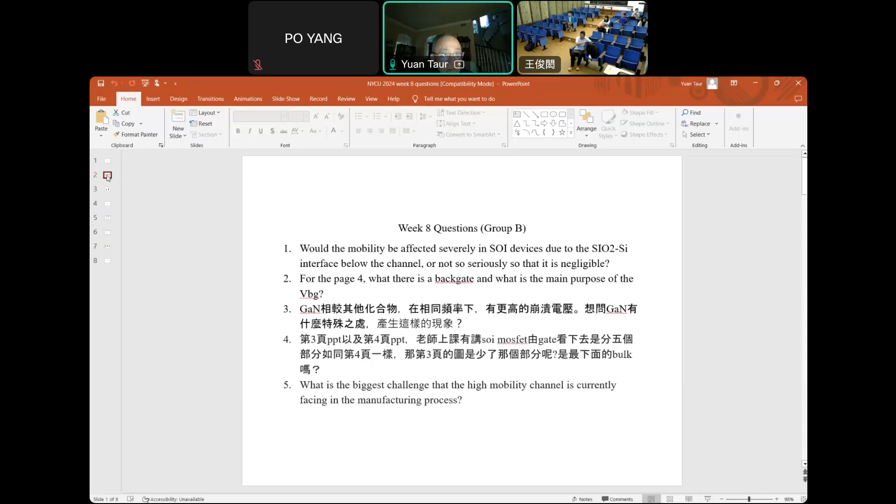Okay, first question: would the mobility be affected severely in SOI due to the interface below the channel?

As far as I know, for thick SOI, the mobility is not very different from bulk. But for very thin SOI, thinner than 5 to 10 nanometers, the mobility could degrade because the back interface is too close to the front channel.

Next question, refer to this chart. There's a back gate, VBG. What's the main purpose? Well, there's a substrate called a back gate, and the bias has some effect, depending on how thick the buried oxide is.

We will derive some equations relating the effect of the back gate bias on the threshold voltage. This is kind of like in the bulk MOSFET, where you have substrate sensitivity. For bulk, beyond the maximum depletion depth, if you bias there, that will affect VT. So it's a similar effect.

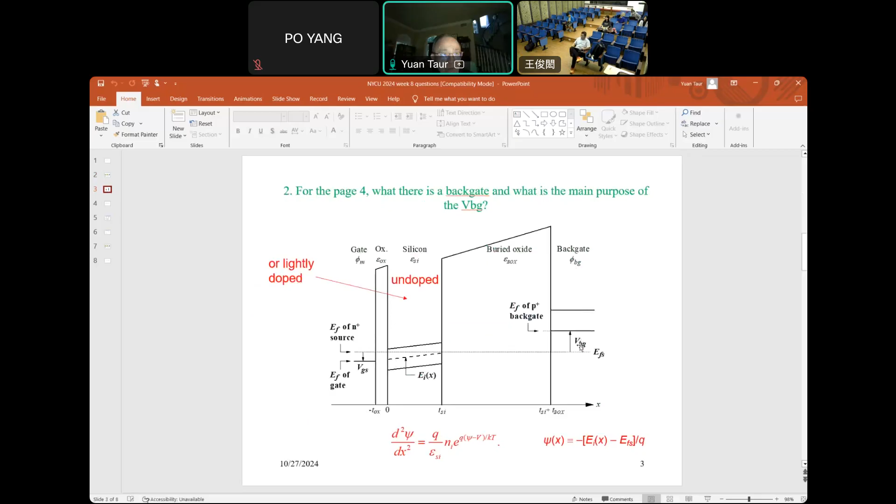Next question is about gallium nitride's high breakdown voltage. I think the key answer is the very wide band gap, 3.4 eV.

The breakdown voltage depends on the band gap, because for impact ionization, the electron has to be energetic enough to produce electron-hole pairs, meaning the energy has to exceed the band gap. So if the band gap is very high, it takes a very high voltage for this breakdown impact ionization to occur.

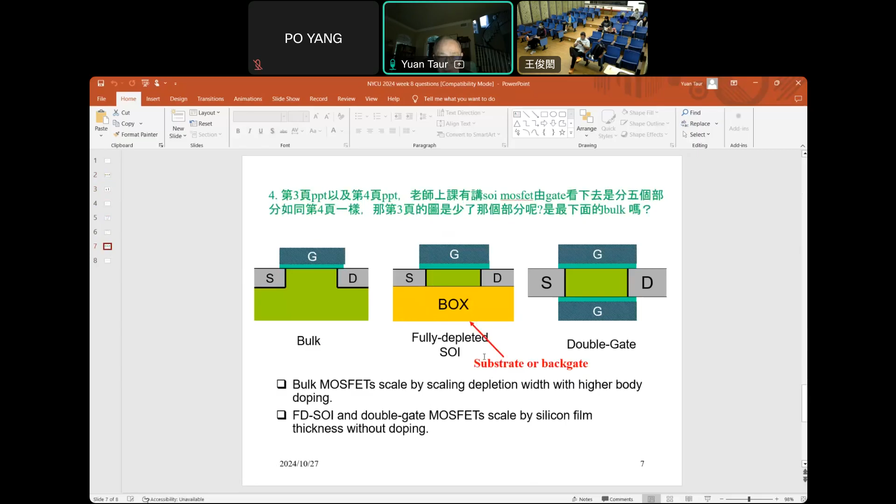The last question I cannot answer, but Sun Yanzang, who can't be here today, will be here next Monday, and he will address this question when he covers the next part on November 4th. Okay, so that's all the questions.

Let's go back to chapter 7, where we had, let's see.

Okay. Andy, so you see the SOI chart? Yes. Okay.

So we covered this in the last class. At the end of last class, we drew the band diagram and defined the potential with reference to the n-plus source Fermi level, this dotted line here, and we can actually solve the equations. The complete solution is here.

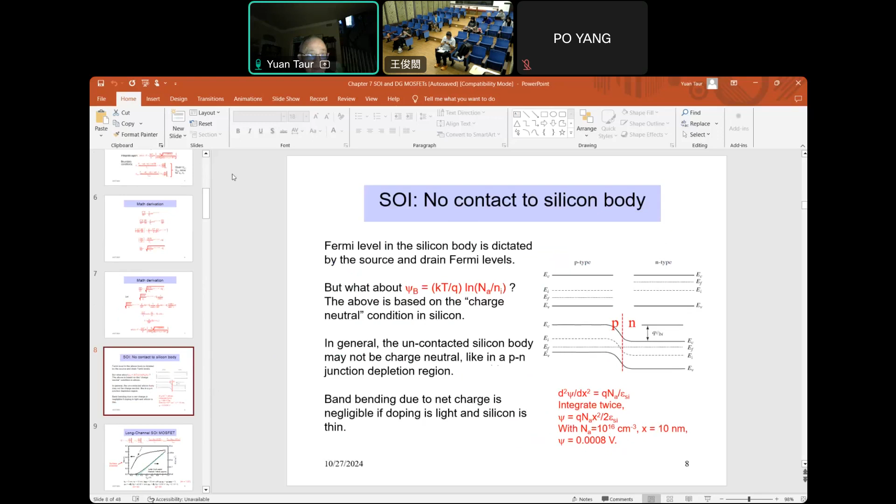So as long as the doping is not much larger than 10 to the 16, and the thickness of SOI is not much larger than 10 nanometer, we can treat the silicon as undoped. This justifies this model approach, that there is electron mobile charge only with no depletion charge, which makes the differential equations solvable analytically.

I went over that before in the last class. So if you follow this model, we can solve in general the potential as a function of x. I'll show one example in this chart. So the parameters are given at the bottom here.

2 nanometer oxide, 10 nanometer silicon, buried oxide 25 nanometers, which is not very thick. And the phi m, remember phi m is the work function of the front gate with respect to intrinsic silicon. Okay, let's go back.

So that's phi m, the gate work function. And what goes in the boundary condition is phi m minus phi si, where si means the work function of intrinsic silicon. We call this phi mi. And for the backgate, we have a backgate work function, again minus intrinsic silicon, and we call this phi bgi.

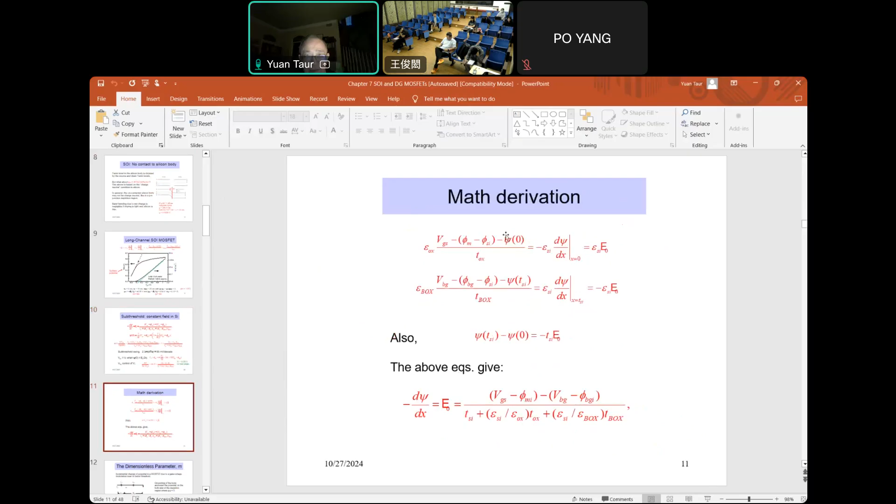That's the solution here, and then we can solve for psi 0. Basically, once you know E0, you can solve psi 0 here. And that's the result, where we introduce the effect of M.

This M actually has the same meaning as in the bulk. Remember that in bulk, we introduce the M factor, which is the ratio of when you apply a differential gate voltage change, how much the surface potential changes. That ratio is defined by M, so it's the same thing here.

So M is defined by the change of gate voltage divided by the change of surface potential, and psi 0 is given by that. So we can solve M, and M is given by this in general, which is 1 plus that, exactly the same as, in other words, if you use this for bulk and then interpret the edge of the depletion region as the substrate or the backgate.

In other words, go back here. The distance, the dielectric distance from the front surface all the way to the backgate, serves the purpose of WDM in bulk. WDM is the depletion width, and if you use that as WDM, then everything just follows.

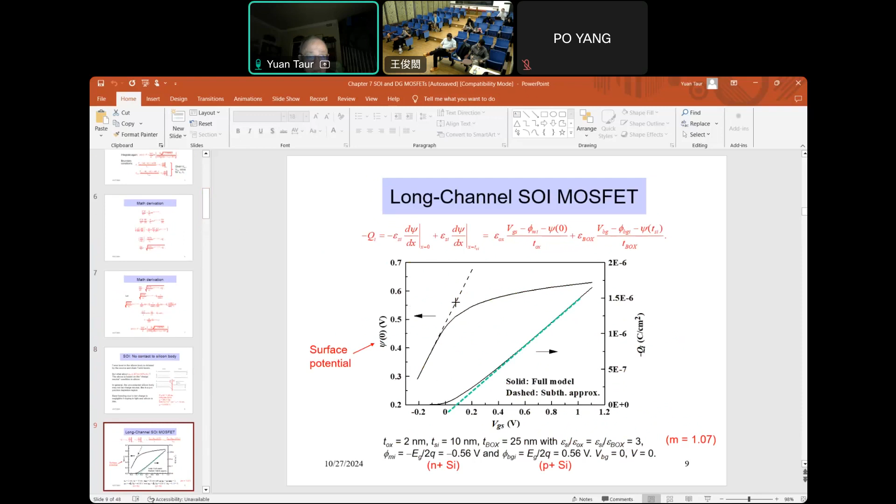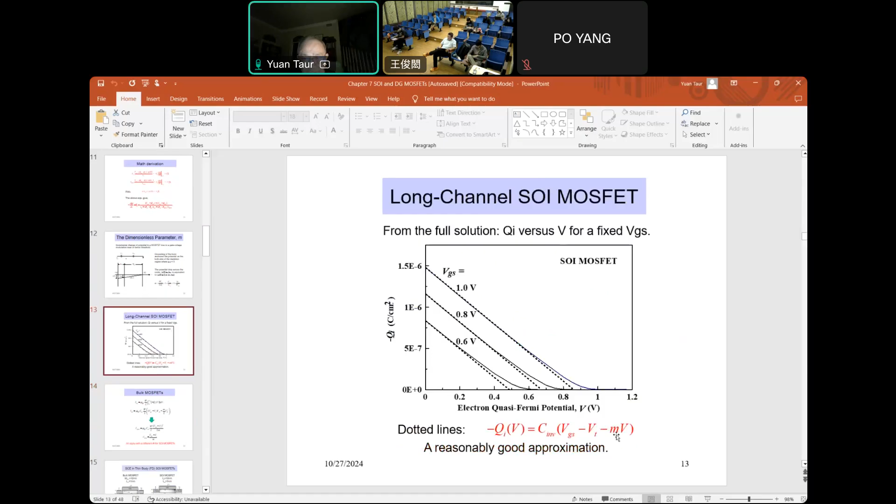So if you apply this, then you can get the current very simply, because remember that in bulk MOSFET we have the current proportional to the integration of QI from V equals 0 at the source to VDS, V equal to VDS at the drain. So if you integrate this, we obtain this equation, which is exactly the same as bulk. And then, of course, the saturation current ID-sat is given by that, and the VD-sat occurs at Vg minus Vt over M. So the only difference is M, the definition of M. For bulk, M equals 1 plus 3 Tox over WDM. For SOI, M equals this: 1 plus front oxide divided by T-silicon plus the back oxide. Once you know M, then the current can be calculated.

So far SOI looks very promising. It's better than bulk because M is close to 1. If M is close to 1, you have a larger saturation current, and you also have a better subthreshold swing. 60, if M equals 1, is 60 millivolts per decade. So it turns off fast, and when it turns on, it's a higher current. That's why in the beginning, sort of in the middle 80s - that's already 40 years ago - people were excited about SOI. But

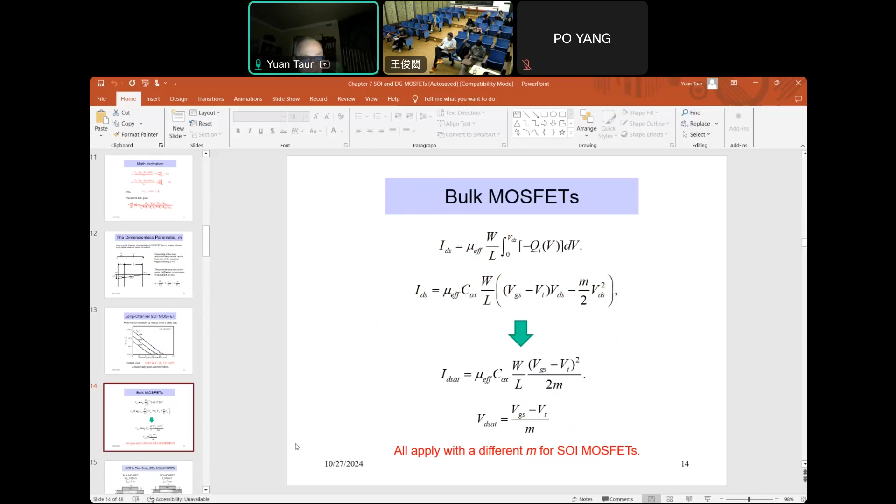Unfortunately, SOI has drawbacks, and that's what we're going to talk about. It's due to short channel effect. So far we modeled SOI long channel MOSFET, but what about short channel? Just like in bulk MOSFET - chapter 5 was long channel, chapter 6 is short channel. So far, long channel looks good because M is close to 1. But when you go to short channel, that's a different story.

The biggest problem with SOI, shown on the right, if you look at the field pattern, is that compared with bulk MOSFET - we assume that the depletion region, WDM, is 10 nanometers, so this is fairly high substrate doping, sort of like a ground plane. It's undoped at the surface, and then the substrate doping goes very high, like 10 to the 19, so that the maximum depletion region here is 10 nanometers, and we use 1 nanometer. So for bulk, you can see the field - this is based on numerical TCAD simulation - and there's no field in the substrate because the field is only in the depletion region.

But for SOI, it's different because you have a very thick buried oxide, where the substrate is very far away from the silicon film. So in this case, the field does not stop. It penetrates into the buried oxide. That's the key difference. The field penetration into the box, in this case, is 200 nanometers, because this only shows about 50 nanometers. It goes way down.

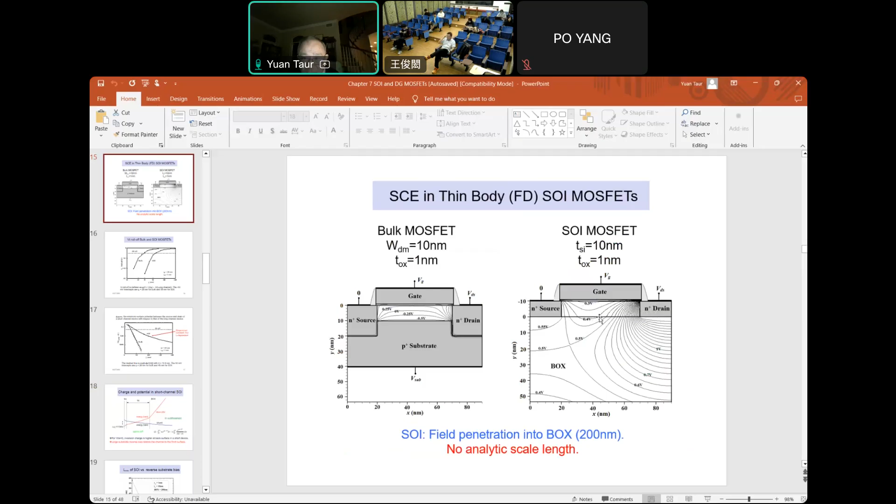So basically, the potential is higher at the back surface, which means the band is lower, or electron density is higher, at the back side. That's not due to the gate voltage, but due to the drain voltage. In a short device, the drain bias will actually control the backside potential here.

In the case where we apply -20 volts to the substrate, we change the potential, the band minimum or potential maximum, to the front surface. This means you have a better short channel effect if you apply a large reverse bias to the substrate.

So let's look at the minimum channel length defined by the VT roll-off equal to 50 millivolts. This is for zero substrate bias, and for SOI, that's 58 nanometers.

But if you apply a substrate bias, it gets better, as shown in this chart. If we apply a reverse bias, fairly large in this case because the box is very thick at 200 nanometers, you have to apply something like 20 volts in order to reduce the L minimum from 58 to something like 43, and then it reaches a plateau.

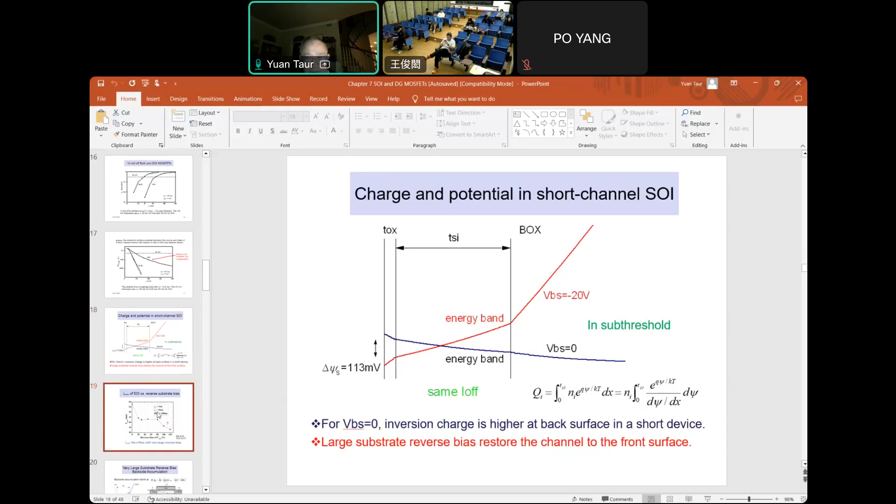In other words, if you apply a reverse bias to the SOI substrate, it will improve short channel effect for the first 20 volts, but then it stays the same up to 80 volts. That simply means that once you have reversed bias, further bias doesn't make the minimum channel length any better until you have really very high substrate bias.

That's like 100 volts. So what happens here is explained: because you apply, in this case, 80 volts, from the band point of view, the backside actually becomes P plus. And the front side at threshold is N plus, the electron side.

When the back substrate bias is very high, that makes the backside of the silicon P plus. So in that case, it becomes a conductor, as shown here. Now you can see the potential is confined in the silicon without going to the buried oxide, because the backside is P plus, which shields any field from the source and drain. So now it looks like bulk.

So when you have the so-called backside accumulation, front side inversion and backside accumulation, that's why it becomes bulk-like, where the T silicon is the same as the maximum depletion width.

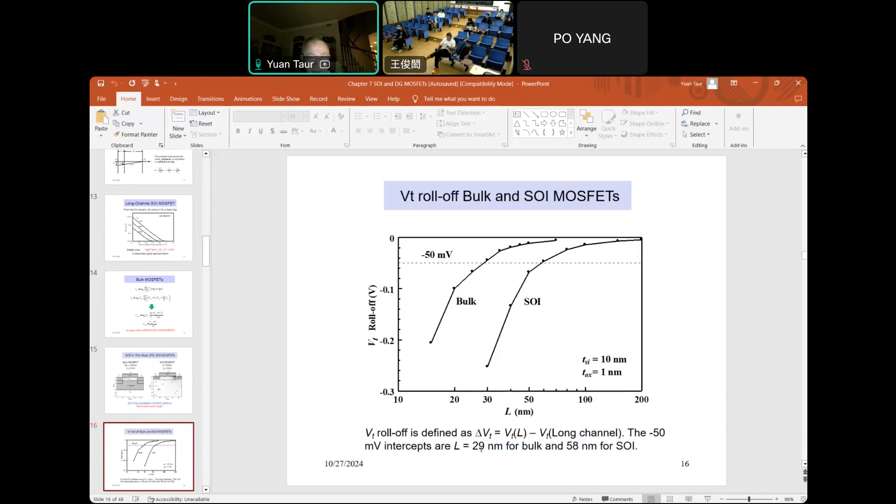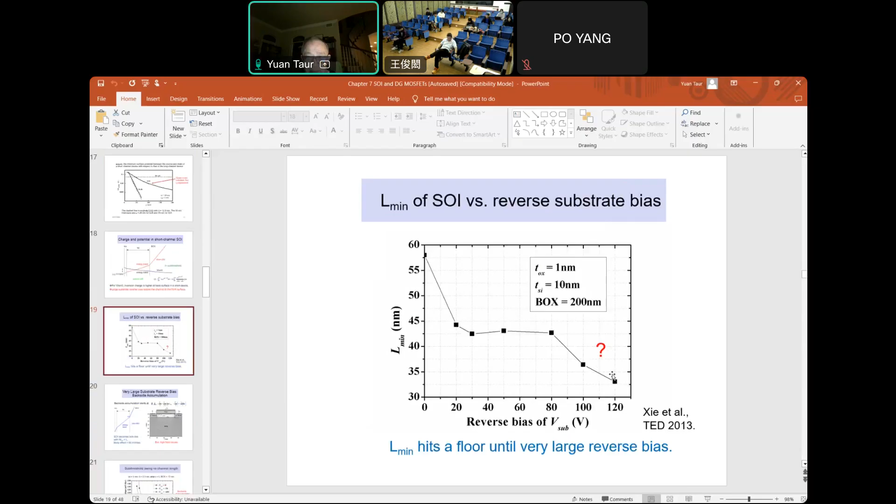After that, the approach is still not as good as bulk. Remember that for bulk, L minimum is 29. But we can get close, this is 32, 33. So with the backside accumulation, we make the SOI behave like a bulk device as far as short channel effect is concerned.

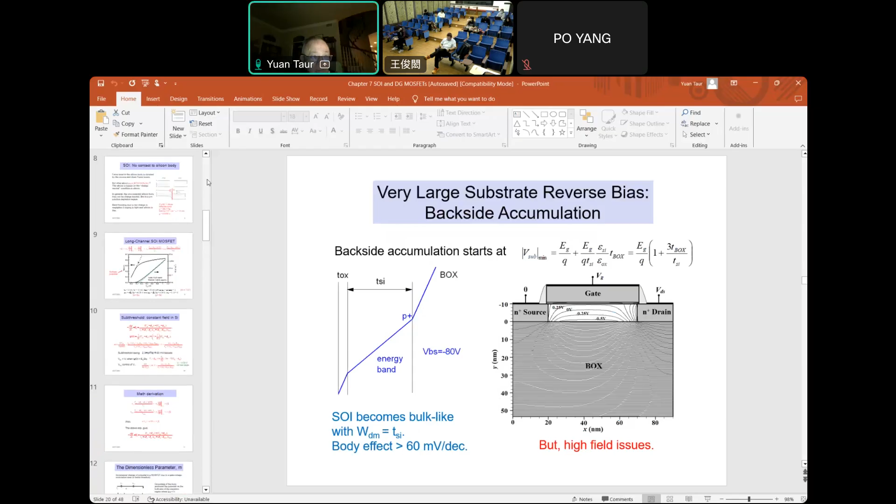But in this case, the M factor is no longer close to 1. Let's go back here. Remember for the long channel case, M is equal to that, and if T-box is large, M is close to 1, because this term is very small. But now I have backside accumulation, so the denominator becomes T-silicon. In that case, the short channel effect is better, but subthreshold swing is no longer 60 millivolts per decade.

It's somewhat worse. So in the next chart we look at the subthreshold swing, or inverse subthreshold slope, in millivolts per decade, as a function of channel length, for different substrate bias, starting with zero substrate bias. In this case, long channel is close to 60 millivolts per decade because M is close to 1, but short channel effect is poor. You can see it takes off when L is 20 nanometers.

It starts at 60, but it goes up to 90. But if you apply a substrate bias — by the way, in this case the box is not 200 nanometers, it's only 10 nanometers thick, so you don't need very high reverse bias on the substrate to get backside accumulation. If you accumulate the backside, M becomes larger, so the subthreshold swing becomes 80 millivolts per decade for long channel, but you can go to shorter channel length without it going up. You can see this curve with no backside accumulation starts good, but it goes up sooner.

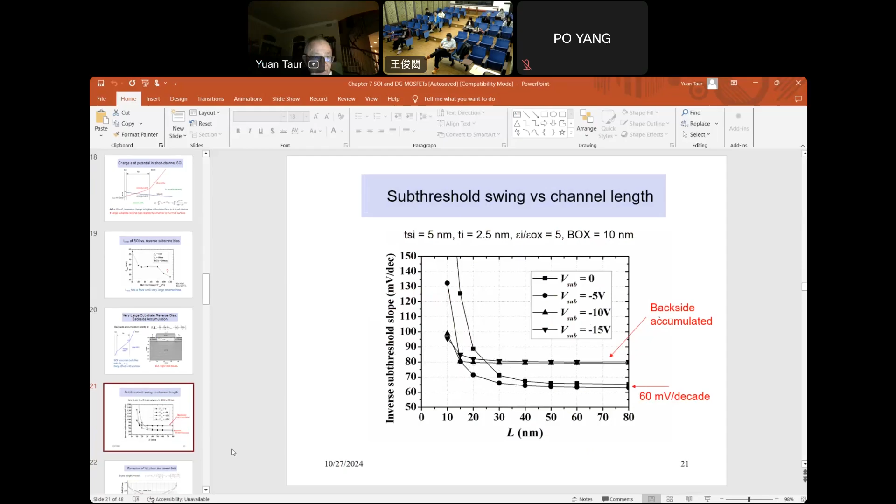So now let's try to do some empirical modeling of the short channel effect in SOI. Basically we try to use the scale length concept, but the scale length becomes a function of L. Going back to this short channel curve, for bulk it's the same slope — lambda is independent of L — but for SOI, the slope keeps changing.

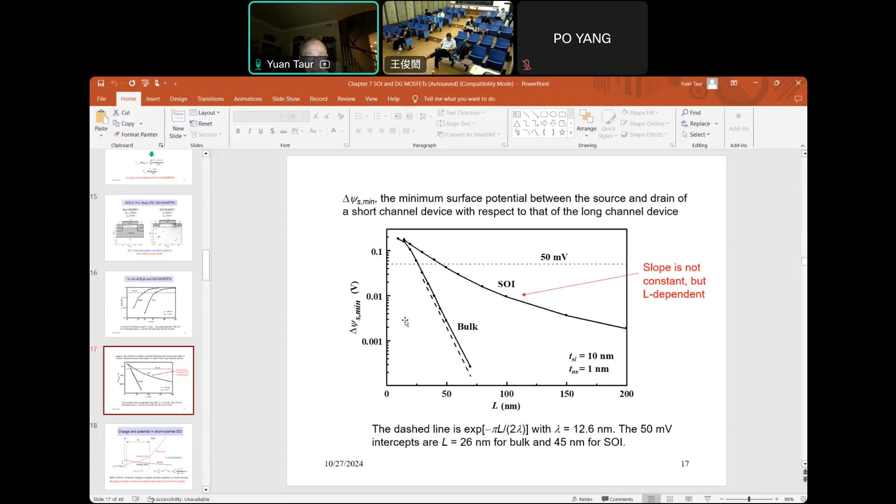So we consider lambda as a function of L. Now there's a way to extract lambda, based on the short channel model in chapter 6: the potential, or the lateral field — the potential in the y direction, the channel length direction — is given by this function, which has a lambda in it. In other words, it's supposed to go exponentially, pi times y over lambda.

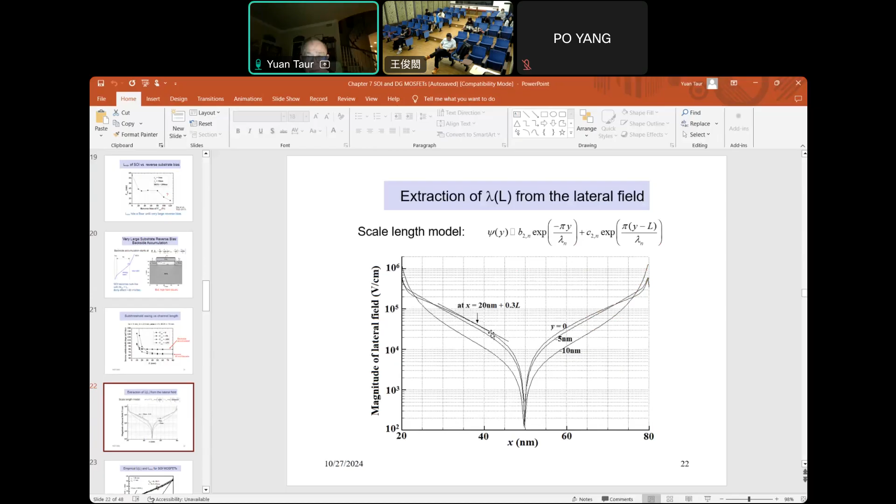So if we look at different channel length devices, we can look at the slope, and using the slope we can extract a lambda, and the result is shown here. So we extract lambda as a function of L using the lateral field method, and we obtain this plot. If you fit the lambda, it's something like 13 nanometers for this thickness, plus 0.18 times L — that's the empirical factor.

That's the dotted line. The actual case actually goes down like that, but that's not important, because once it's below 50 nanometers, the short channel effect is too large, so these devices are not very useful due to severe short channel effect. Largely it follows this line, and all this empirical fitting can be summarized here. This number, T-silicon plus 3 T-ox, is 13 nanometers.

13 nanometers is this. And then we say L-min equals 2 lambda, where lambda is given by that. So from that you can solve for L minimum, the minimum channel length, given by this factor, where K ranges between 2.1 and 2.5, depending on whether you apply substrate bias or not. So this is the empirical effect of minimum channel length for SOI.

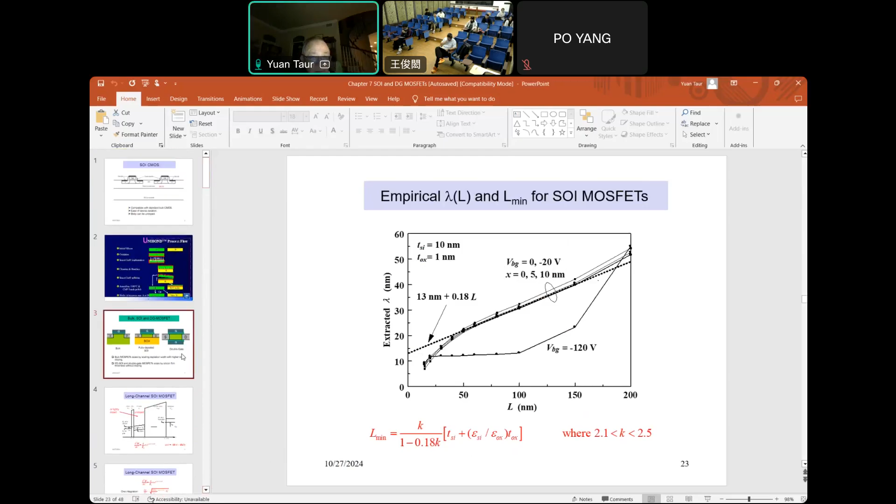So we go back to this case — the initial schematic. We start with bulk: we need doping to define the maximum depletion width to control the short channel scale length. And for SOI, the long channel is fine, but short channel is bad because of field penetration into the buried oxide, even though you don't need doping here.

But the ideal structure is actually double gate, where you also have a T-silicon. So you don't need doping here, but instead of a buried oxide, you have another gate, so that the field is confined. This should have reasonably good short channel effect compared to the SOI case. So the next topic is double gate.

Okay, so this shows, but the question is, how do you make a double gate? There are different configurations. If you can make the gate on top and the bottom, and this is the silicon wafer. But how do we make sure? There are requirements because the gate has to be self-aligned. Remember that now the top gate is easy to self-align, but how do you self-align the bottom gate?

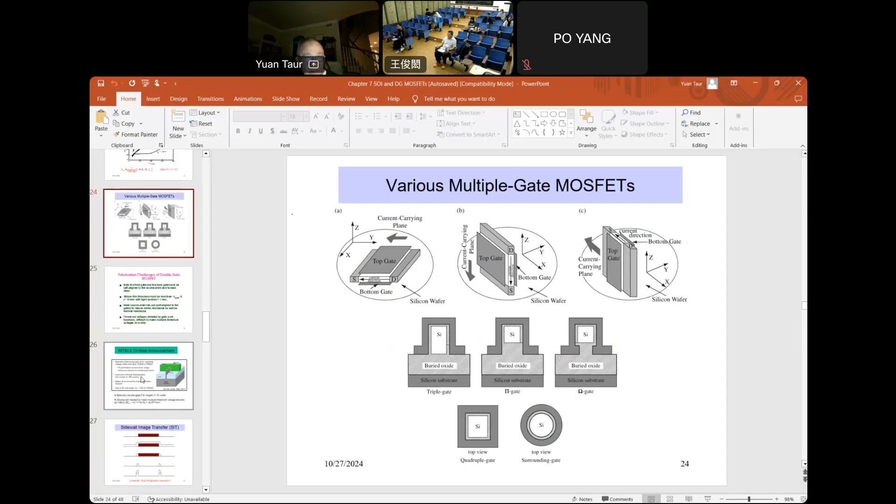After that, of course, we know that the industry has followed this approach. So for high performance logic, instead of bulk, the industry moved to FinFET. Now, first the lithography — lithography problem can actually be solved by this approach.

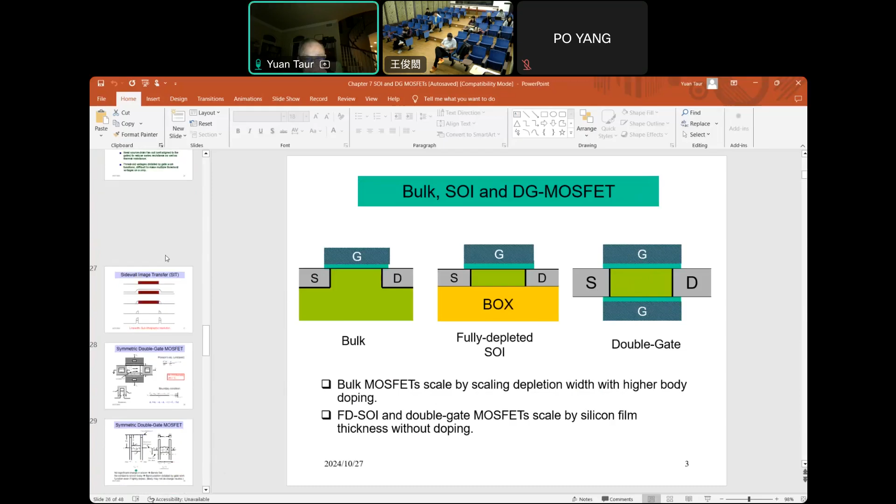But how do you have multiple threshold voltage? You cannot, okay, it's very hard to have multiple gate deposition for a different part of the wafer. So this point is just saying, how do you adjust the threshold voltage?

Well, you can still put some doping in there. For example, I forgot the silicon thickness, but you need something like 10^18 to shift the VT by about tenths of a volt. So this is depletion charge density, q N_a times T_silicon in the silicon for this doping, divided by 2 Cox, because the depletion charge is shared by 2 gates. Only half of the depletion charge goes to one gate, and the other half goes to the other gate.

So if you put this much doping in the thin silicon fin, then you can shift the threshold voltage either up or down by tenths of a volt, depending on the doping polarity. And so this can be done.

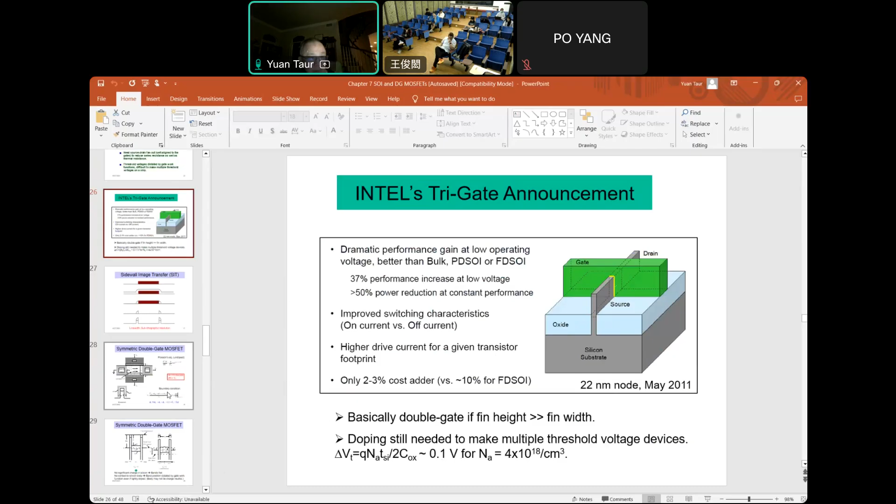But what's the best benefit for double gate? Okay, this is the best benefit: it's 60 millivolt per decade.

In other words, M is always 1. And to see that, we go to this chart.

So this is M. If there's a front gate, this is for single gate. Okay, so you have a single gate, this is either bulk or SOI. You have a substrate, and that doesn't change.

But now you have 2 gates. In other words, you move the gate voltage both on the left and the right. So of course, if you move this horizontally downward, then the surface potential is the same as the gate on the front and the back.

So M is 1 if you have a double gate. In other words, the other side is no longer grounded, but rather connects to another VG, and those VG are the same. So when you change both VG, you change both points up and down, that will change the surface potential by the same amount.

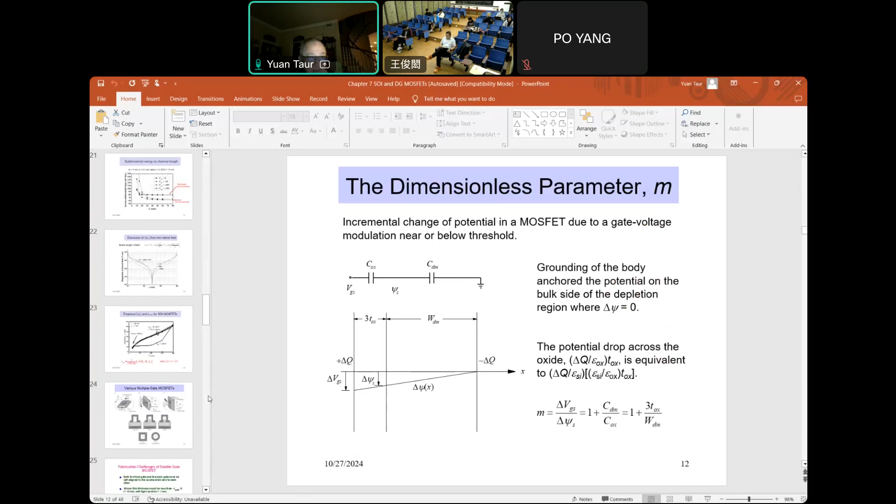So that's why M is always 1. This actually is the best benefit of a FinFET or double gate: M equal to 1.

So now you can turn it off. If the threshold voltage is only 0.2 or even below, you can still turn it off. In bulk, you are stuck with 80 millivolt or 90 millivolt per decade because M is 1.3 or larger. That's controlled by the doping.

All right, so let's talk about the model for a symmetric double gate, which means that the top and the bottom gate have the same work function and connect to the same gate voltage. So VGS top and VGS bottom, and the source drain is in the other direction, and the silicon film, well, in terms of FinFET, looks like this.

This is a cross section in the perpendicular direction here. So this FinFET, the gate goes like this, and that's the T silicon, T ox. But it's easier to analyze this way.

So we define 0 to be the center of the silicon film at the source. X is in the depth, the thickness direction. Y is in the source-drain direction as before. X can go from minus T silicon over 2 to plus T silicon over 2. Y can go from 0 to L, where L is the channel length.

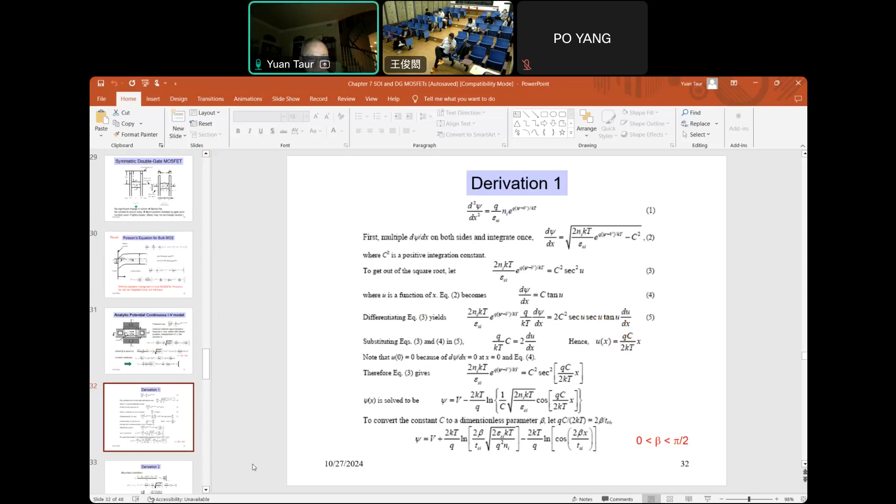What's the equation to solve beta? Beta is given by this boundary condition, and again we can derive that. After we solve this boundary condition, we put the psi solution, and also d-psi-dx becomes beta tangent beta, and then we can put it back here. We obtain this equation. So this equation is the equation to solve beta.

That replaces the initial boundary condition, and it depends on v. In other words, beta depends on v, which means that beta changes from source to drain. So we will go back to here. So v varies in the y direction, and so does beta. Beta is also varying in the y direction from source to drain.

And we call this beta S and beta D. So beta S is solved by letting v equal 0. That's the source. So v equals 0 at the source, and we solve this implicit equation - that's called beta S. And at the drain, v equals VDS, we solve it again, and that solution we call beta D. So beta S and beta D are solved this way.

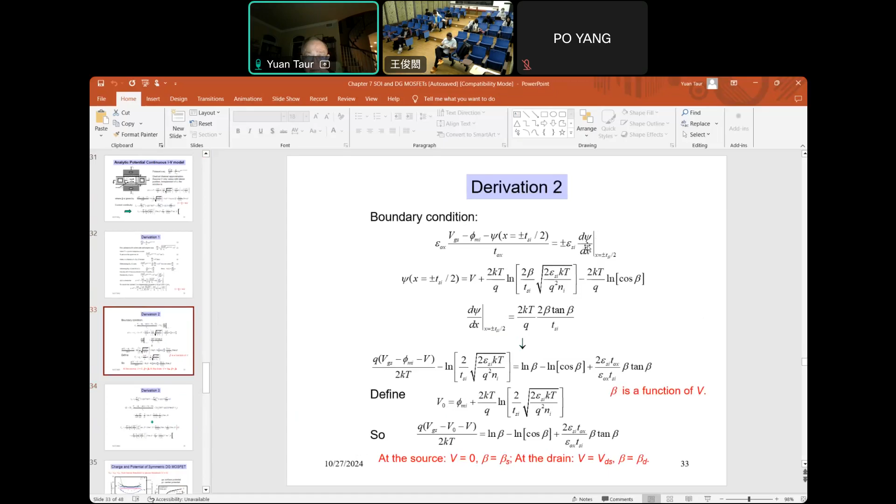And QI, remember that's related to the field. Let's see, okay, that's QI - the front and back. Front and back are symmetric, so when you invert both surfaces, that's why you have this QI factor of 2. Factor of 2 comes in - that's the front and the back, the two channels, you turn on both surfaces.

And so we can put everything in terms of beta in here. dV/d-beta is this function, Qi of beta is this function, and then we integrate - that's this equation. This actually can be integrated analytically into this form.

And in front is just a constant, but for the integration, the original integration is from 0 to VDS. Once you change to beta, it's from beta S to beta D, or beta D to beta S - you want to make it positive. There's a negative sign somewhere.

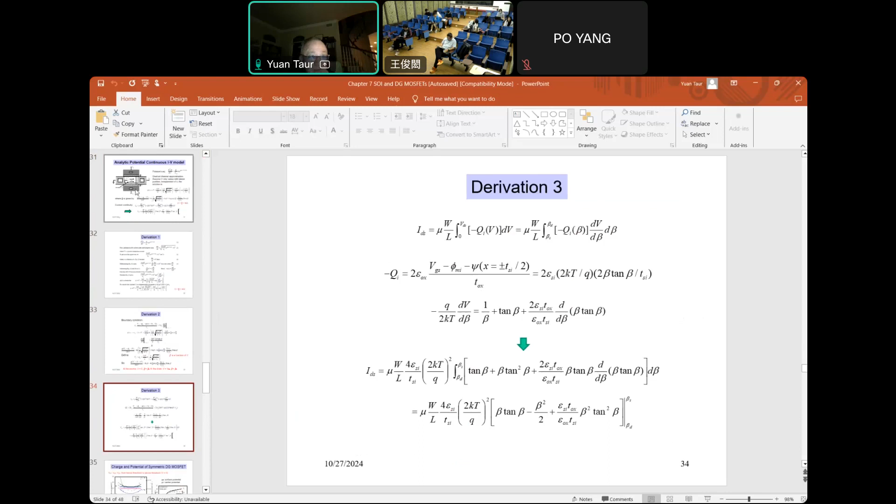Okay, so that's where the solution is. So let's go back to this expression. The analytical solution to the original Poisson equation is here - it's a function of x with a parameter beta dependent on v, given by this equation. This equation is a one-to-one correspondence between beta and v. And then IDS becomes this function.

So to calculate IDS, you just have to calculate beta S and beta D. Once you have beta S and beta D, you just put them into this integrated bracket here and then get the IDS.

The range of beta is between 0 and pi over 2. Because let's look at this equation - VGS minus V, this can be negative or can be positive. So the left side can go from minus infinity to plus infinity. The right side, if beta is 0, then it's minus infinity, because log 0 is minus infinity.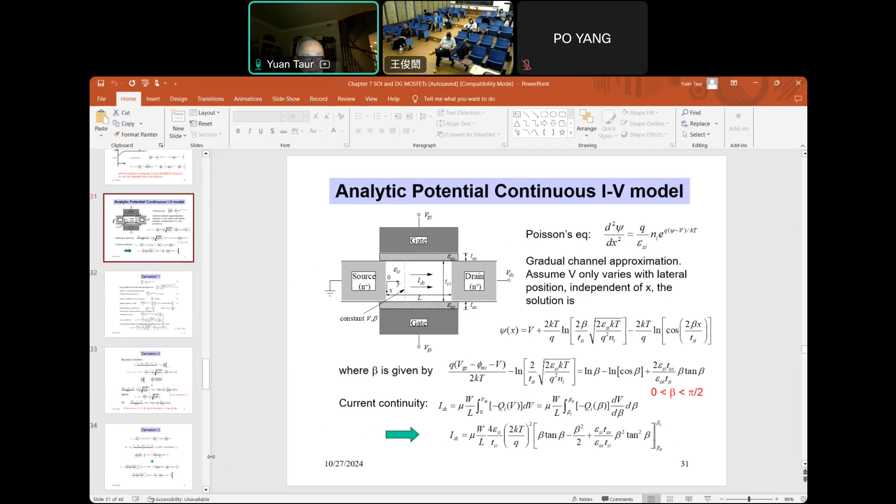So next, we try to look at the regional approximation of the analytic potential model, some people call the beta model. In other words, that's the model, only one function covers all regions. But now we apply different approximations so that we can generate explicit solutions, because this is an implicit equation of beta S and beta D. But to get explicit solutions, we have to use regional approximations.

So first we consider, remember that the beta range is 0 to pi over 2, and the F function has 3 terms: log beta, log cosine, and beta tangent beta, above threshold. Now the left side is F of VGS minus V0 minus V, and this usually is a large voltage, let's say 1 volt, divided by 2kT over Q. 2kT over Q is only 50 millivolts, so this is much larger than 1. In that case, the dominating term of those three is beta tangent beta.

Because when beta approaches pi over 2, this can go to infinity, so this can be large, but these two are limited. When beta equals pi over 2, log pi over 2 is not very large. So when beta approaches 0, cosine beta is 1, log 1 is 0. As it approaches pi over 2, cosine beta equals 0, this can be large, but this one goes much larger because this one is a log factor.

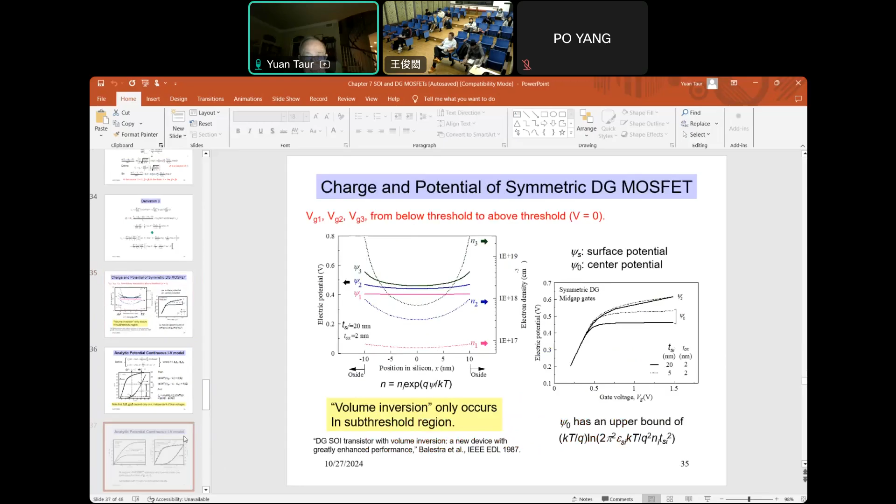Once you are above threshold, the center region doesn't contribute to any current, it's only the surface. So it doesn't matter how thick or thin T silicon is if you are above threshold. Above threshold only depends on Cox, only depends on Tox, which is the same in this case, so there's only one curve even though you have two silicon thicknesses.

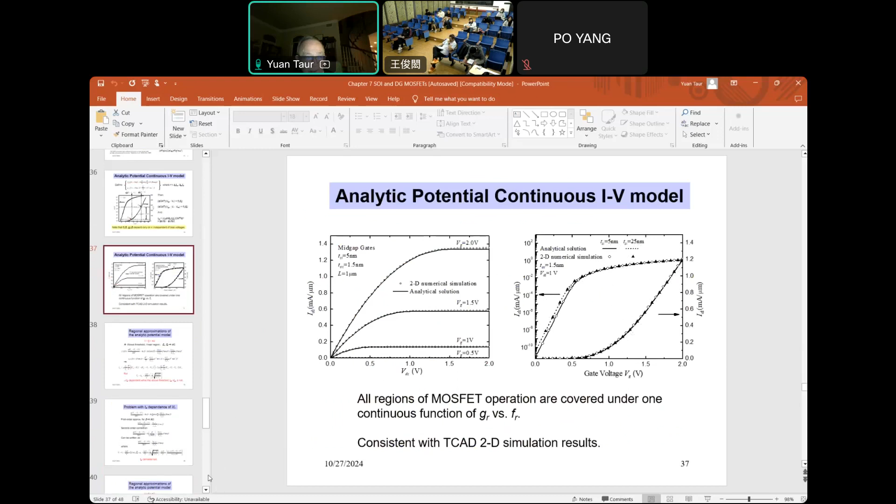Below threshold, you have volume inversion, so T silicon matters, as described by this expression here. So this is the long channel model for symmetric double gate MOSFET.

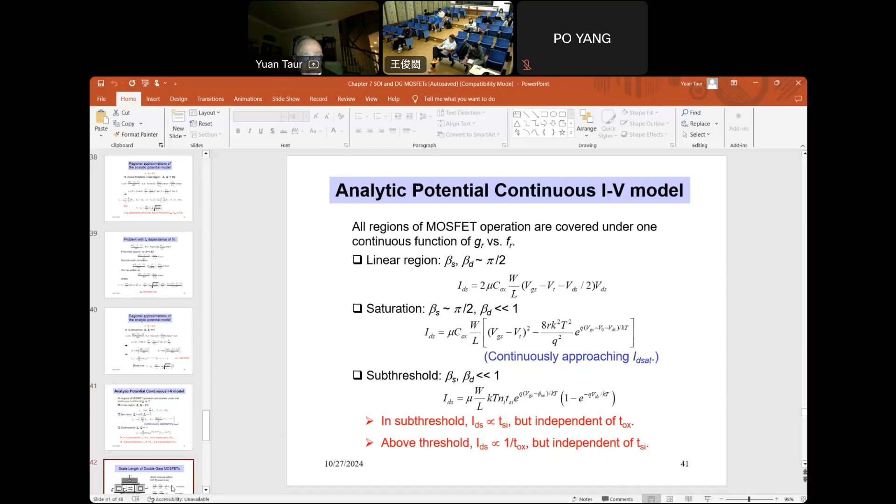What about the short channel? Scale length. We can follow the same approach as the bulk short channel effect, the scale length model for bulk in chapter 6. We solve the 2D Poisson equation in silicon and in oxide.

In this case, I include a doping Na, even though it's not important, I just include it for general purpose. If it's lightly doped, then you can set Na equal to 0. And for oxide, this psi is for silicon. Psi with a superscript plus or minus is for oxide: plus is for one oxide, minus for the other oxide.

Then the boundary condition on the two gates: psi equals VGS minus the flat band, which is a work function difference. At the source, psi of x, 0 is Eg over 2q, that's n plus, and drain is Eg over 2q plus VDS, just like in the bulk case, n plus drain biased at VDS.

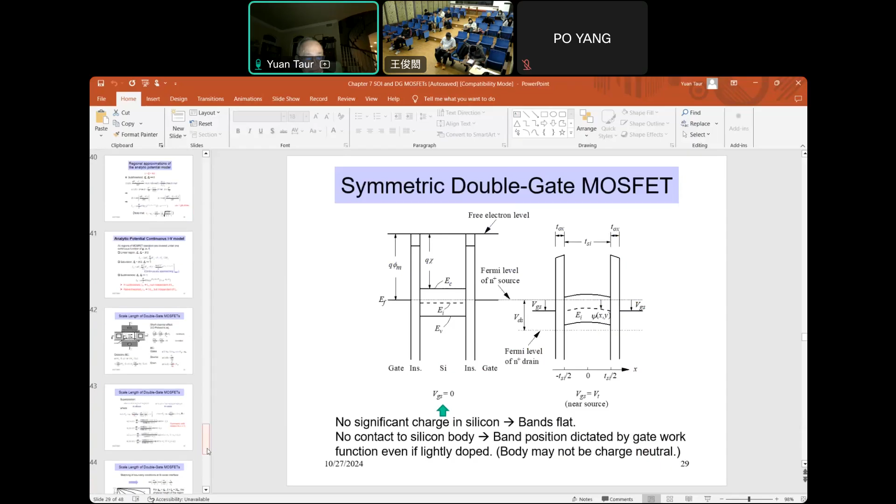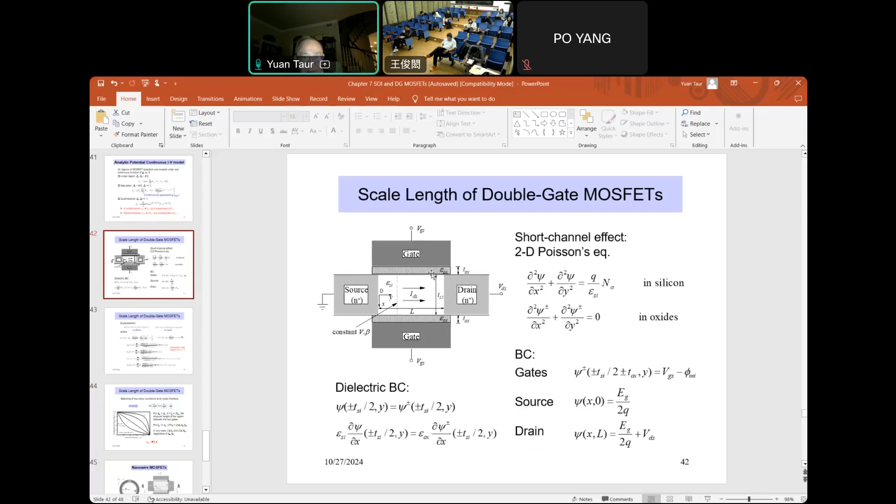T silicon plus 2Tox. Very simple. And this we go back. T silicon, if epsilon oxide and epsilon silicon are the same, then the total distance from top gate to the bottom gate is T silicon plus 2Tox. One Tx on top, the other Tx at the bottom. So this lambda is simply the physical height of the region between the two gates, from one gate to the other. Okay, so that explains this simplest straight line here.

At the lower right corner, Tox is much smaller than T silicon. In that case, the first angle is close to 0, and the second angle is close to pi over 2. So we can again approximate, and then we obtain the lambda solution here: it's T silicon plus 2, so in this corner, 2 epsilon silicon over epsilon ox Tox.

In this case, if you have a high K, that helps, because if your epsilon oxide is high, that makes this small, which means the scale length is small, but it's still limited by T silicon. So in any case, lambda is larger than T silicon because T silicon over lambda is less than 1, and lambda is larger than 2Tox because Tox over lambda is less than half. After you determine the lambda, then minimum gate length is about 2 lambda, the same as in the bulk case.

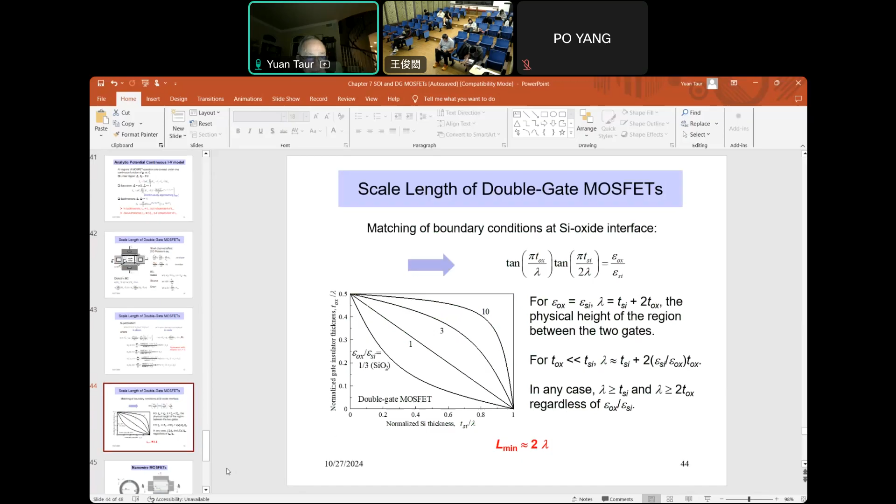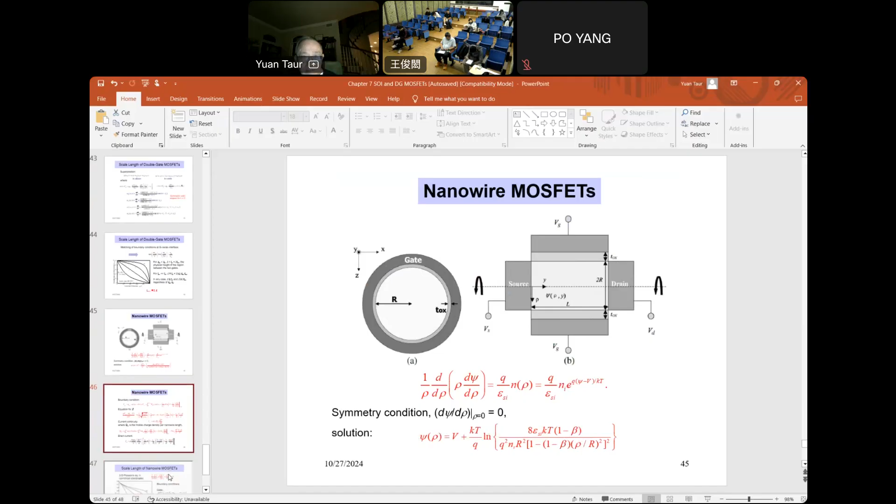So it goes in parallel with this symmetric double gate, except that all the equations are changed. But the principles are the same.

Okay, so we're almost done with chapter 7. There's a couple of charts left, and we'll wrap it up in the next class, next Monday.